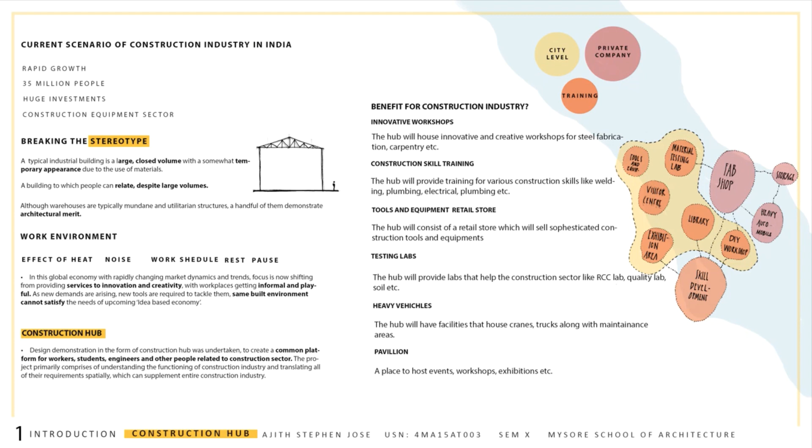It was hard for me to find many live case studies, but I got to study a few buildings associated with the industrial sector which portray architectural merit.

Automated warehousing facility in Faridabad - this is an exposed brick structure which is energy intensive, sustainable and climate responsive, which we don't usually see in a warehousing facility.

Coming to the Caseros warehouse in Argentina, here the interior lies in contrast to the exterior. The use of skylight, the mezzanine and the minimalistic design gives a character to this warehouse.

Then coming to the next building in Derksen, here the design originates from the desire to create a larger volume in relatable proportion combined with the search of optimum use of light. Here the architect has also tried to abstract the sawtooth roof in the building.

Then coming to the filter life factory, here the architect has tried to create a youthful feel in the factory with translucent surfaces and colorful details. The industrial materials, colorful details and a layering of transparent and translucent surfaces is applied consistently throughout the design. These buildings are industrial buildings, but they portray a lot of architectural merit.

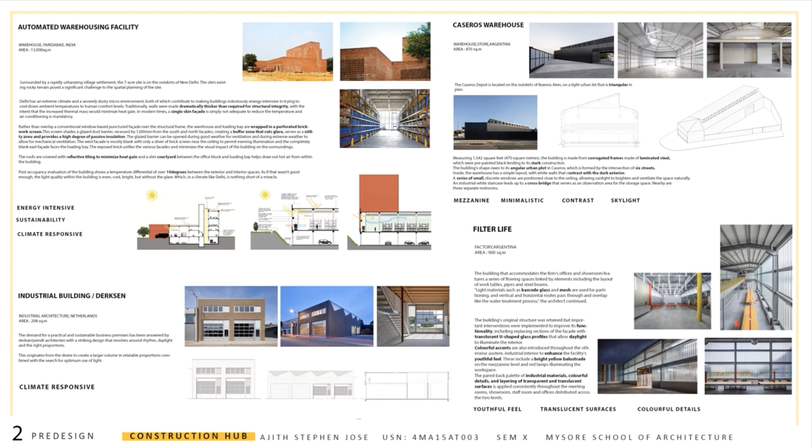Coming to the program, the entire design can be segregated into public, educational and industrial. The public area will have retail store, pavilion, library, testing lab and DIY workshop. The educational area will have a skill training center, and the industrial area will accommodate the FAB shop and garage for heavy vehicles.

The project will have free-flowing users as well as stagnant users. The free-flowing users will be those coming to the retail shop right in the front, as well as those coming to take part in any event happening in the pavilion. The stagnant users will be the regular students and staff on site, and also the workers in the industrial area.

Coming to the area analysis, the site has about an area of 5.2 acres and a built-up of 7,624 meters square. The diagram below shows how the different areas are segregated in the built-up.

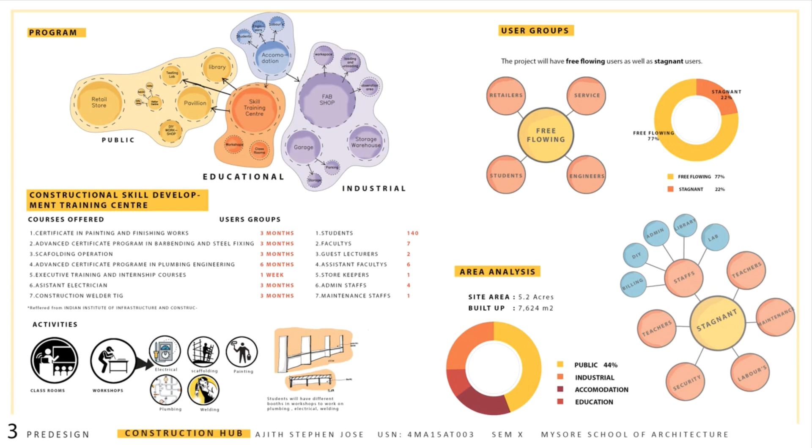The site accommodates various activities. Coming to the construction skill development training center, here the most important activity happens in the classrooms and the workshops. Here students get to learn electrical, scaffolding, painting, plumbing and welding.

Coming to the FAB shop, it has various activities in relation to steel fabrication like cutting, welding, folding, etc. I have also listed down various machineries and environmental fundamental requirements needed for a FAB shop.

Then coming to the library, the library here in the hub will be mainly for construction people, those involved in the construction industry, like engineers, architects, students and skilled laborers.

The next one is the DIY workshop. This is a workshop where people can themselves use the equipment available and create their own furniture with wood, metal, etc. They will also have accessibility to some modern machinery like 3D printing and laser cutting machines.

Then comes the pavilion. The pavilion is a space where they can host exhibitions, recruitment, workshops and even hands-on workshops.

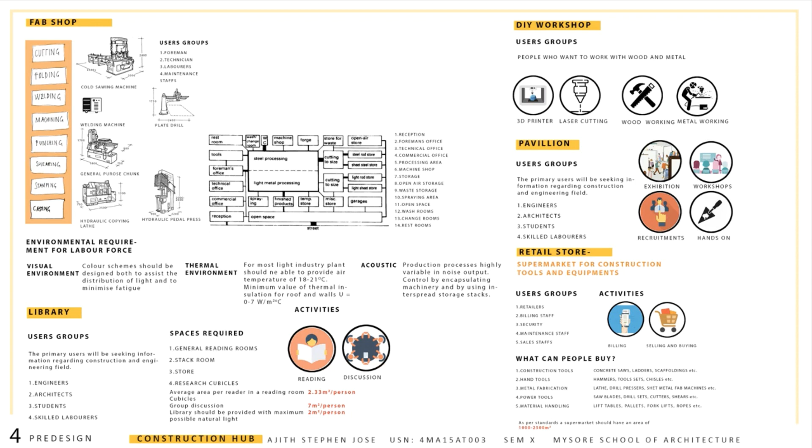Coming to the retail store. This retail store is like a supermarket where people can get construction tools, hand tools, metal fabrication tools, power tools and material handling tools.

Coming to the site analysis, location and neighborhood. The proposed site is just 7 km away from the Cochin International Airport and 32 km from Ernakulam city. The site is located in Angamali, just 2 km away from National Highway 47, which increases the viability of the site since it is a construction related project.

The site also has 3 engineering colleges and 2 architectural colleges within a 13 km radius, which provides an opportunity to expand the training center and open the hub as a learning platform for students in the colleges. Site size and zoning.

The site has an area of about 5.2 acres and can have a coverage of 50%. The existing site already houses a steel fabrication workshop, welding institute providing vocational training, and warehouses for storage of construction materials and tools.

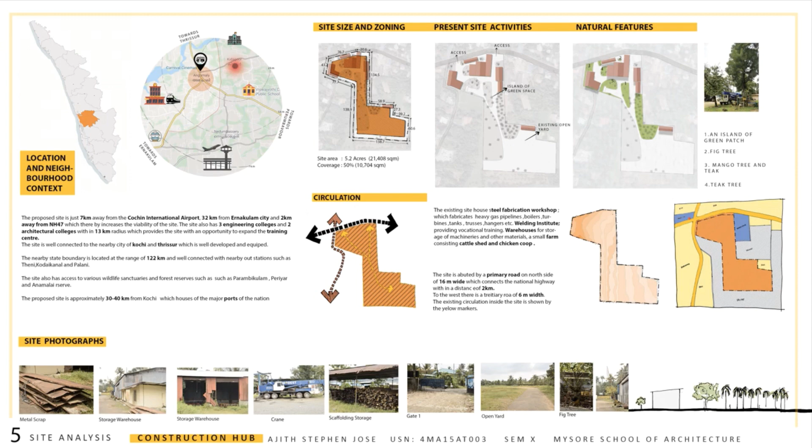Initial ideas and concepts. One idea was how to improve the working environment with respect to ventilation, illumination, noise, rest, pause and effect. The other one was how to break the stereotype, as I mentioned before. The third one was the use of materials and structures inspiring the construction community.

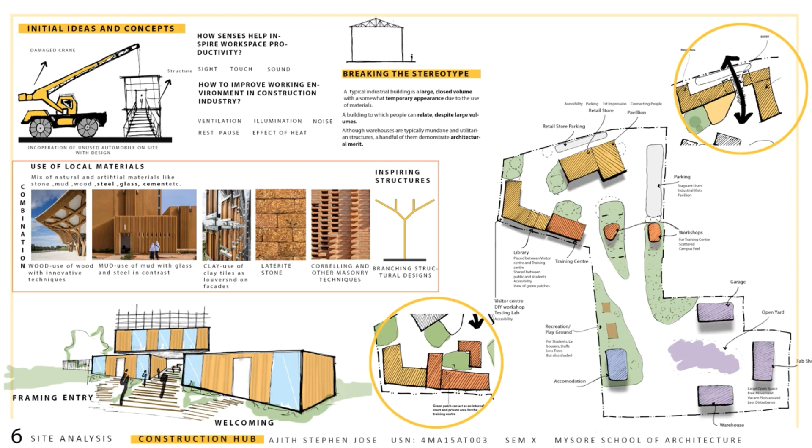The other sketches show my initial ideas and the initial zoning, with the retail store and pavilion happening in the north, the training center to the west, and the industrial area with the FAB shop and garage to the south.

Site planning. As you can see, the site is spread like 2 chunks with a narrow part at the center. Since the site has various angles, it was very hard for me to place every block effectively.

If you see the site plan with the roof, most of the buildings are overlooking the north. The pavilion on the north side of the site got that organic shape due to the shape of the site and the buildings around it.

Apart from the blocks, there are playgrounds and other recreational areas toward the south. If you see the second plan, with the ground floor, you can understand the different movements happening on the site. The yellow shows service, the red shows pedestrian, and the blue shows vehicular entry.

The diagram on the right shows the initial zoning and planning. Initially I had separate blocks, but due to poor functionality, I came up with a much more organized and connected plan like this.

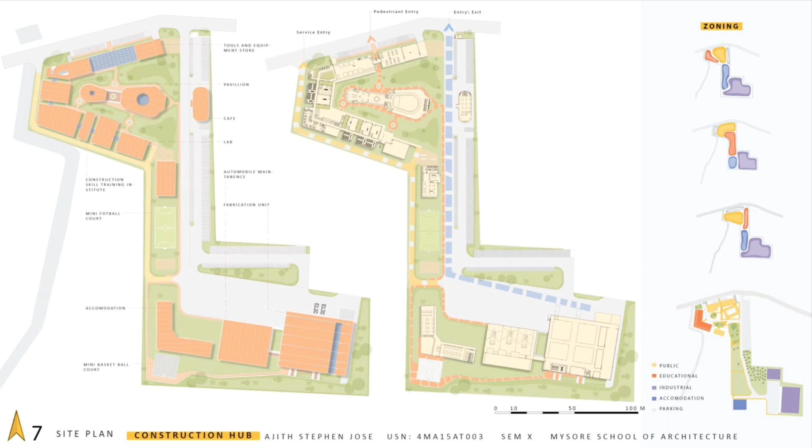Coming to the design of the retail store. This store is like a supermarket for construction tools and equipment. This store gives the first impression of the construction hub to someone passing by the site, as it is located on the north side next to the existing road.

The main reason to place it here was accessibility, so that people don't have to come into the site to buy something from the store. The main ideas I had in designing this building were a welcoming building that should complement the infrastructure inside the site to create a sense of suspense for someone passing by. Apart from shopping, it can have an area to display or sell some scrap art done at the DIY workshop.

Considering Kerala's rainfall, the building has a sloping roof, and louvers are present to foster ventilation.

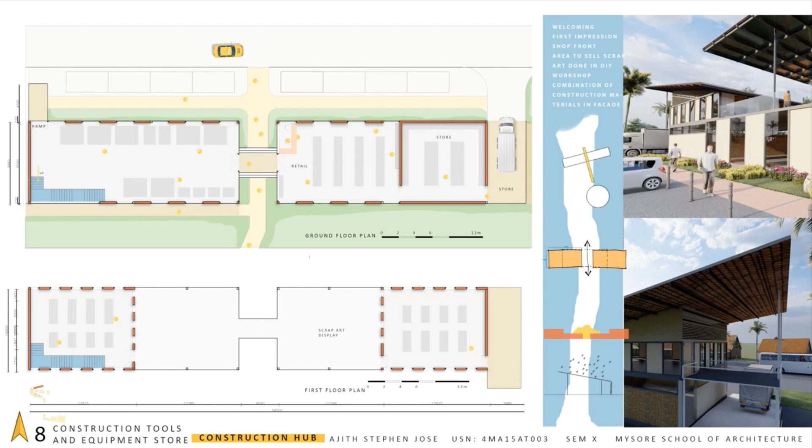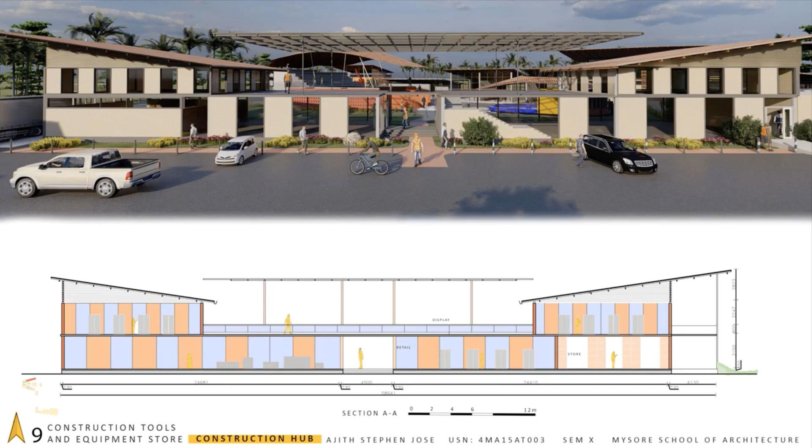The pedestrian entry to the site happens in between this block, with the building framing the entry. The render above shows the impression it creates with the elevation as well as the organic pavilion happening behind it. This is how it complements the infrastructure inside.

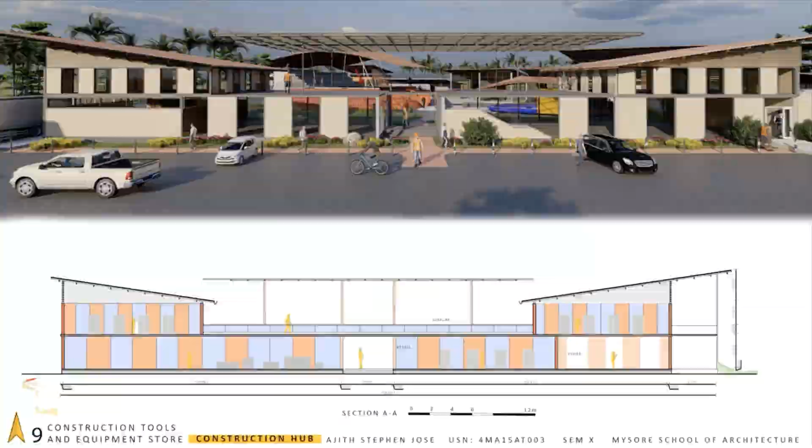Construction Skill Development Training Center. This is a center where you can get trained in various construction skills.

Since it is an educational block, the design has to foster the learning experience. The main activities happen in the workshops and classrooms, and I have placed them in such a way that there is a connection between the classrooms and workshop, so the faculty can point out something in the workshop while teaching in class.

Due to this, the classrooms happen on a higher platform overlooking the workshop at a lower level right in front. You can clearly see this in the section given above.

If you observe the schematic plan at the center of the sheet, the red area shows the classrooms and the yellow one shows the workshops. All the common activities like staff rooms and admin happen in the center, where the two wings of the plan meet.

The other idea I had while designing this building was to have green corridors and pockets for good ventilation and good connection with nature, since the site is in Kerala. Some of the schematic diagrams show how green spaces happen in between the building.

The center also has a library, present on the first floor. The library is the only space on the first floor, and it happens right above the common area in the center. You can see this in the section given below.

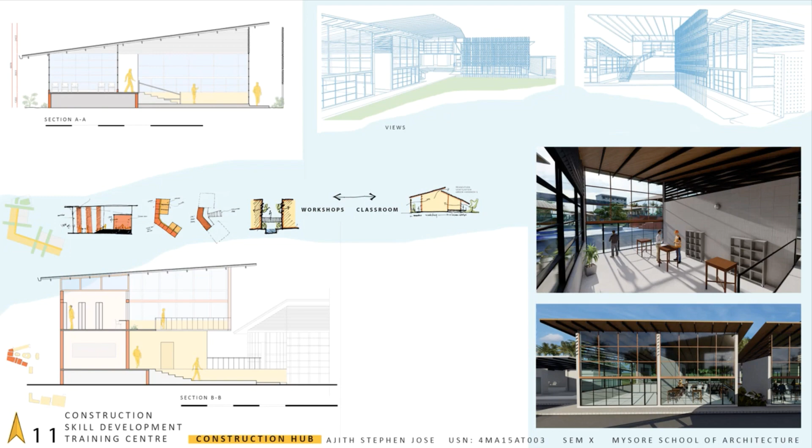Most of the building overlooks the north side, which provides good indirect light to the space.

Coming to the plan, if we observe the ground floor plan starting from the central space, you can see a court happening which acts as a welcoming space and also has the capacity to be used as a gathering space.

Next to the court, the steps lead us to the higher plinth with staff room, classrooms and admin. If we move to the other side of the building from the center, it leads us to the classrooms and workshops.

You can also see the interesting green pockets happening in between the building, which acts like a transition space and also provides connection with nature with respect to ventilation and view.

The north side of the building ends with an interesting washroom happening with a courtyard, and the south side ends with the construction lab.

The brown patch on the south side is an open workshop area where masonry can be taught.

Coming to the first floor plan, as I told before, it is only the library. The library can be accessed through the stair from the court.

The reason why it is separated is because the library is not only open for students but also to people who are part of the construction industry, like engineers, architects, and skilled laborers.

The above render shows how the Mangalore tile screen is shading the corridors and workshops. The drawing below it shows how the Mangalore tiles are used as sunbreakers, with two C channels on both sides and a central rod connecting one tile to another as a support.

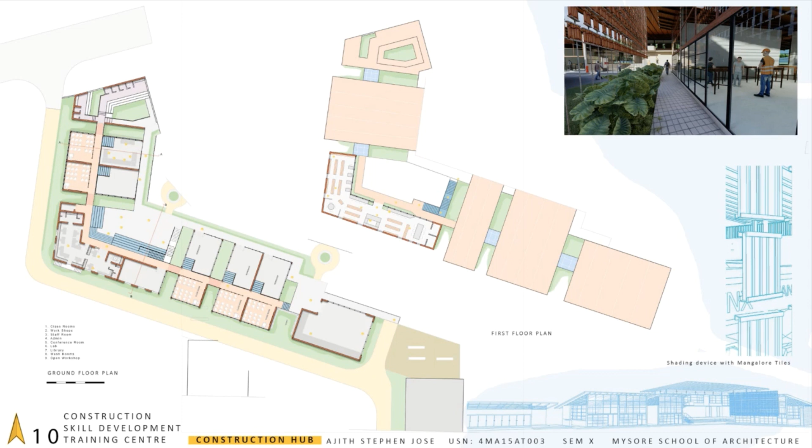Next we come to the Pavilion and Welcome Center happening in the center of the site. The Pavilion is the most interesting structure on the site and has a different character with respect to all other buildings on site. The Pavilion and Welcome Center can be accessed through a common porch happening between them.

Once we enter the Pavilion, there are stairs taking us to the higher level on either side, which goes in perspective. The Pavilion has a small court which can host events and workshops, surrounded by a wide corridor which can be used as an exhibition space.

The area below the stair is used as a storage space. In between the court and the corridor, there is a seating space along the court, shown in darker color in plan. This connects to Kerala's architectural style of having a courtyard with seating space along it.

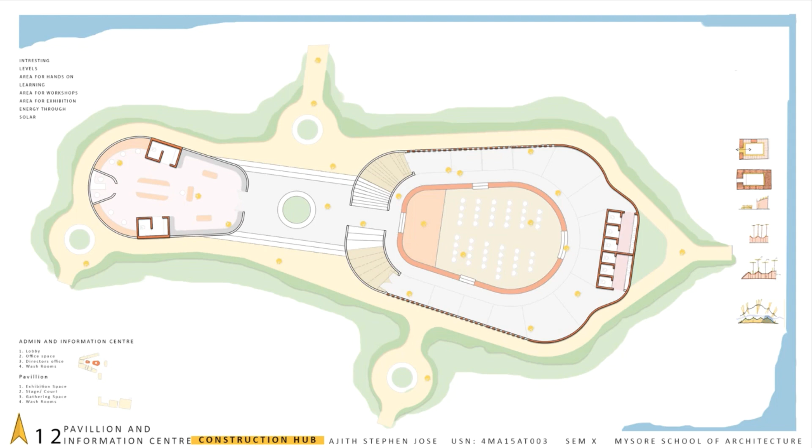This pavilion can accommodate various activities like stage events, exhibitions, hands-on workshops, and even people can use it to have small discussions on a higher level.

Coming to the FAB Shop, first I will discuss the idea I had in breaking the stereotype. If you see the schematic sketches on the right side, the first one shows the use of a mezzanine in breaking volume. The next one shows how facade and spaces can be broken to relatable proportion in relation with human scale. How the skylight can be used, and how to break the volume by having a block like this inside the unit.

How the recreation area should be, and the last two diagrams show how the entire mass is broken with the green court happening in between.

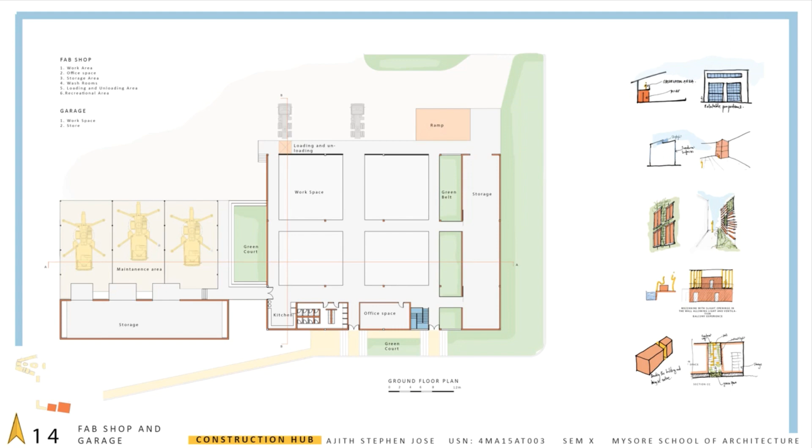If you see the plan, it has a lot of spaces which can provide pause or break for the workers, like the green courts and the relaxation areas. Since the plan is overlooking the north, it helps to lit up the spaces with indirect light.

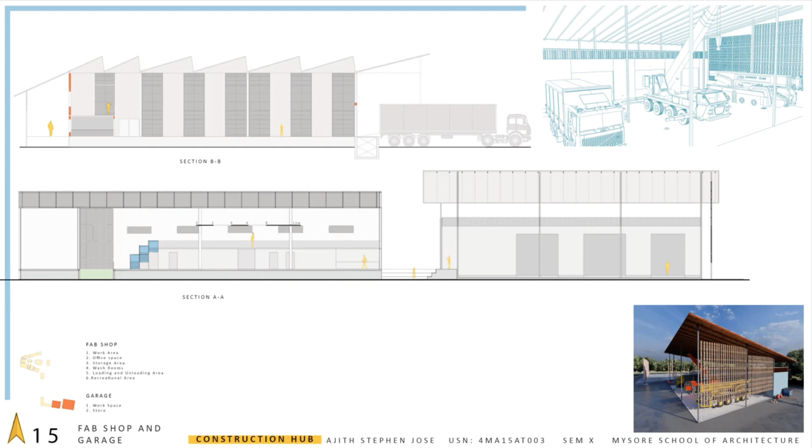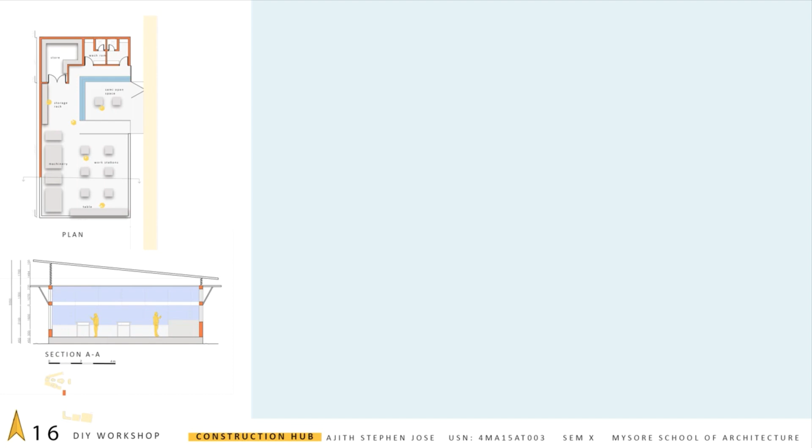Coming to the plan, the DIY workshop has workstations, storage spaces, semi-open working area, spaces to access the laptop and other electronic devices, and a space for the machineries like 3D printing, etc.

That's all I could explain about the construction hub. If you see the buildings, you can understand the use of corridors, verandas, porches, courtyards, sloping roof, which connects to Kerala's architectural style. Thank you.